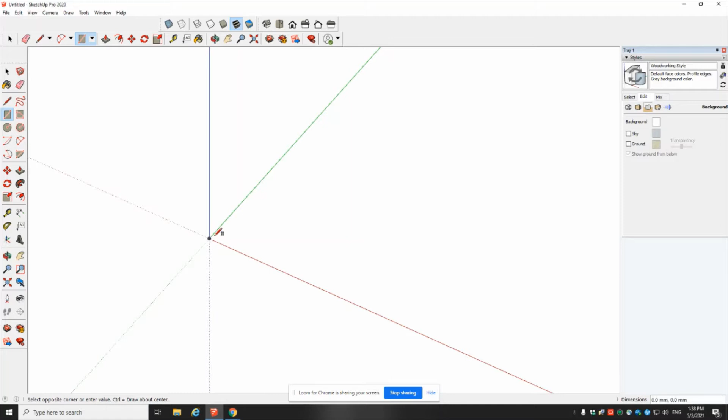First thing, as you can see, your mouse turns into this little pencil with a blue box in it. Okay, we just click on the point of origin here and move the mouse in an upwards direction. Remember not to hold your mouse button down. What I want to do is draw a square 200

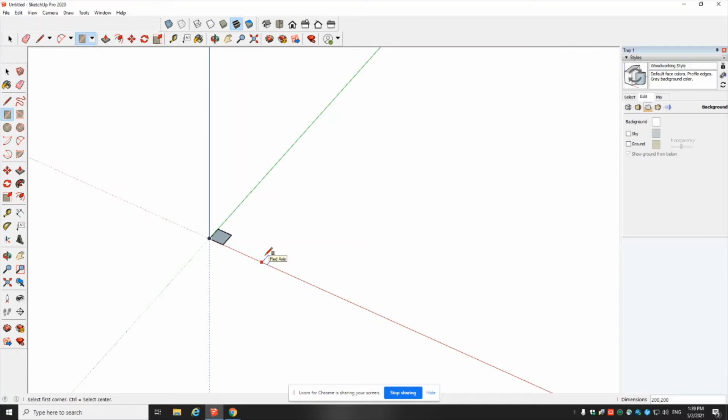by 200. In this situation, I'm going to type the value 200. You see over here, dimension 200, comma 200. And you press the enter key on the keyboard. Okay. When you see this, it's very small. Not to worry. Just go to zoom extents, click on it, and you have a bigger size.

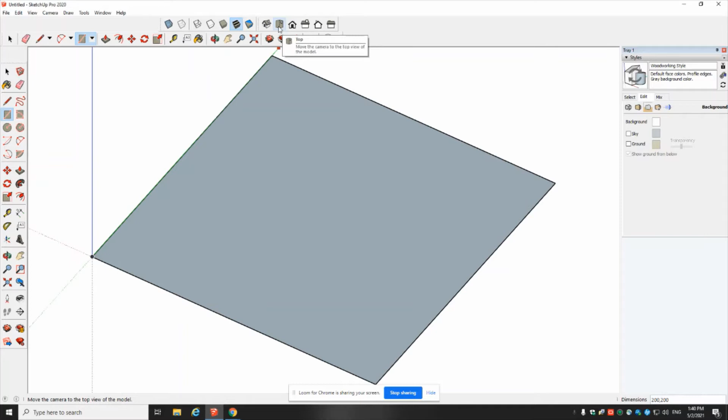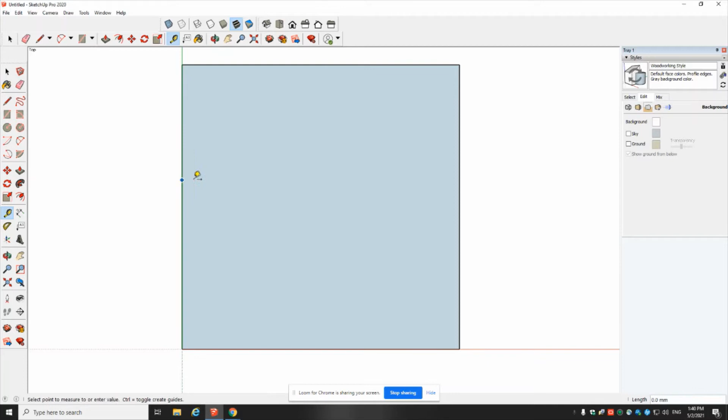So now we want to start to make the sample model. First of all, we click on the top icon so you can see it better, clear. Then next, you use your tape measure tool. Click on one side, bring it, okay, click here until you can see the dotted lines, and you type 100, half of the size of the square.

Okay, press enter. Next, over here below on the red axis, click, bring up another 100, and you press enter. This tape measure tool is like your marking out. Okay, next, from this half, we divide another half, 50, and from this half, we divide 50. Okay, and we have these drawings.

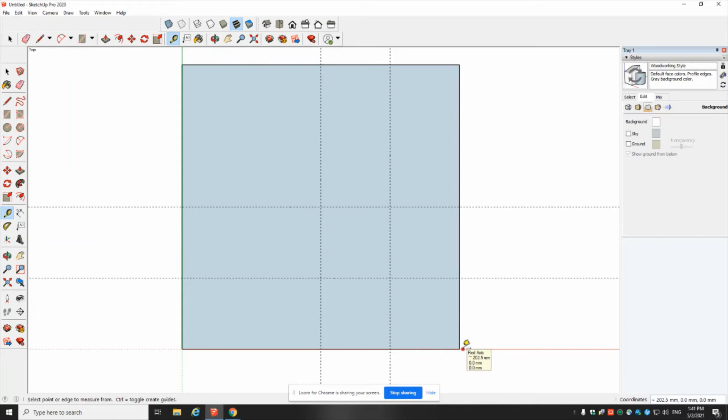Next, we want to draw a line from here to here, and from here to here, and join from here to here. We use the pencil tool or the line tool. This is the line tool; you can see it looks like a pencil. Click here, bring to the end point, click, move to the intersection, click, then another one down here, click. Next, you click on this end point, go to the intersection, and click on the end point here.

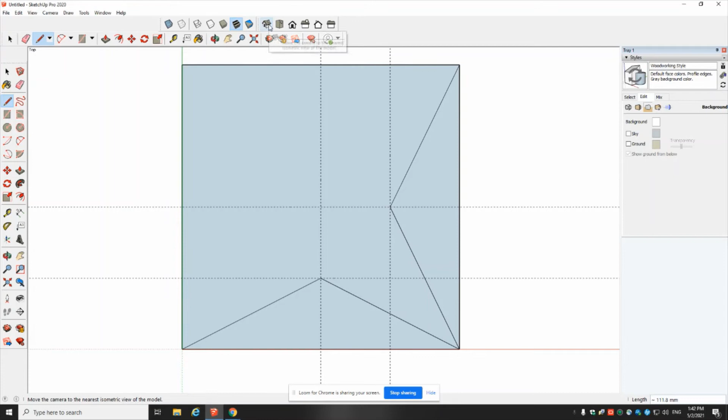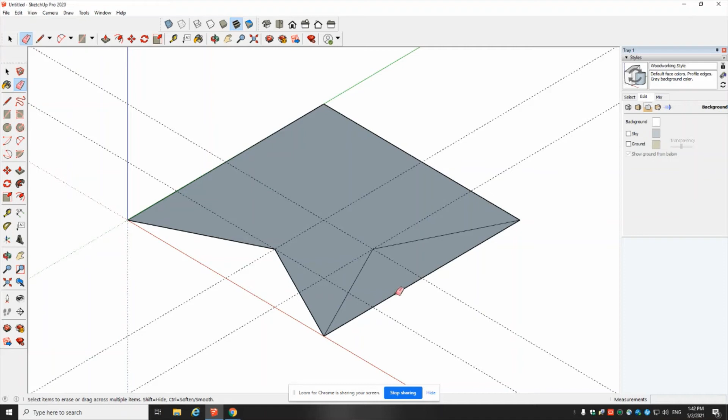So, to see how the design looks, you go to the ISO icon here, click, and you see the shape. Now, we want to erase these lines by using the eraser tool. This is called the eraser tool. Then you erase this one, and see, this one becomes white. Here also, erase. Okay, next, we will be using the circle tool.

Click on the circle tool, then put it in the center of the intersection. In the event that your circle is not a perfect circle, before you start, you just type 360 at the side here, then you press enter, and the circle will go to full 360. So once you have the circle icon on, click on the intersection, click size.

We are using a diameter of 20 mm. So the radius you see on the right side of the screen below, right? Here is radius, so the radius will be 10. Type 10 and press enter.

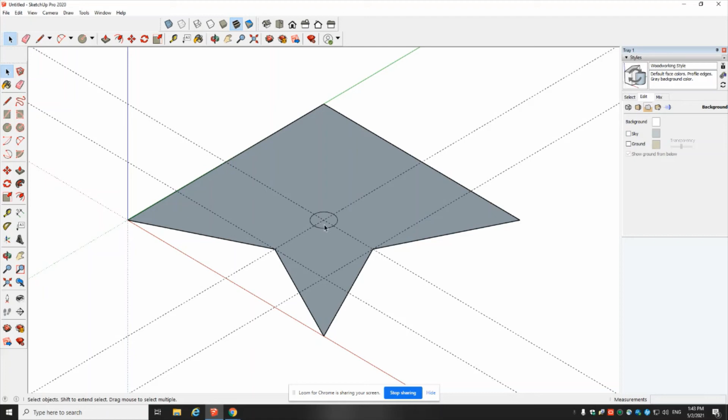Then you use the select tool. Go to the center of the circle here. You see all the blue small dots. Right click, erase. Next, we're going to delete all these guidelines. How do you delete them? You can use the eraser tool to delete one by one, or you go to edit, delete guides. You see all the guides have been deleted.

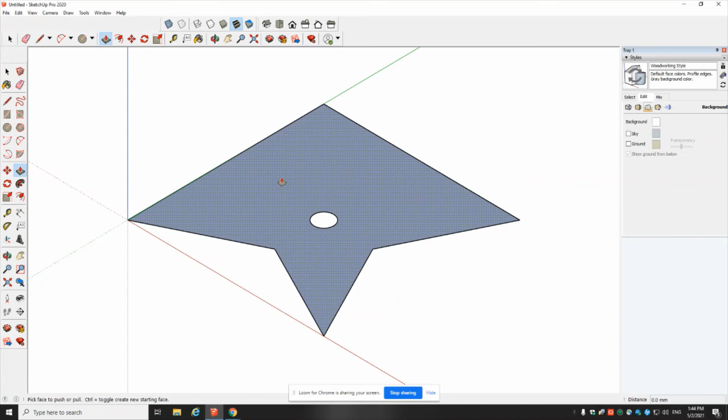Next, every piece or item must have a thickness. So for this, we just use the push-pull tool. Bring the push-pull tool to the surface, click on it, drag up. We give a thickness of 15 mm. Then tap enter, and you have the thickness.

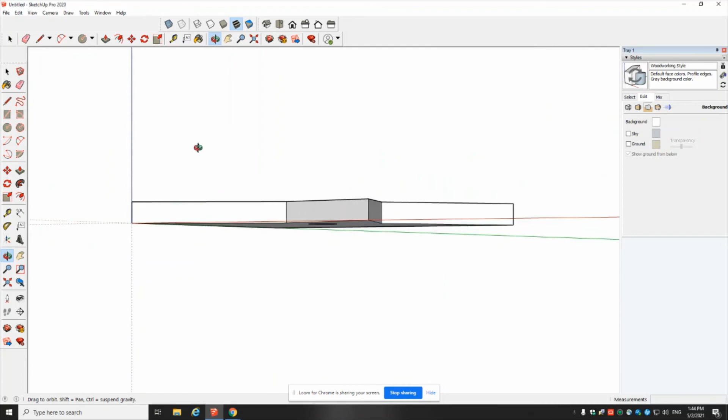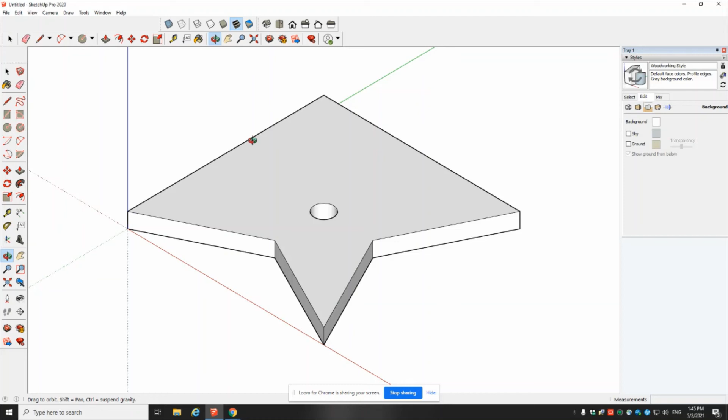In order to see whether it is okay or not, you use the orbit tool to turn around and watch everything. The hole is true. The diameter 20 hole is true. Next, you click the ISO icon, so it goes back to the ISO angle. So for this item, we need to make a group.

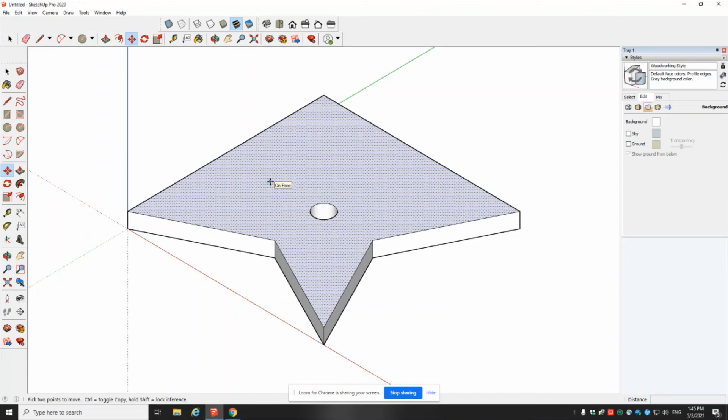So if we move the whole thing, it will move together. For example, I use the move tool. I want to move this whole workpiece, so I use the move tool. But when I click on the surface, as you see, it moves only the surface, not everything. So I go to edit, undo move.

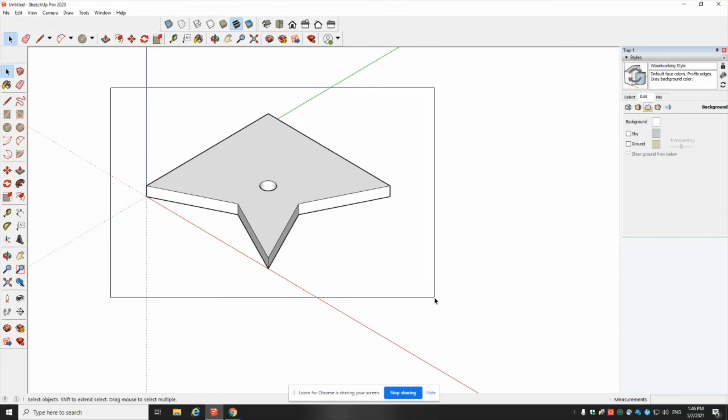So what I do is make it a bit smaller by scrolling the mouse to zoom out, click on the select tool, click from outside and drag. You see all the surface and the side perimeter turn blue. Then right click, make group. Then you pan it to make it in the middle.

Right, this is the first sample of the metal plate holder. We will move on to making another copy in the next video tutorial.